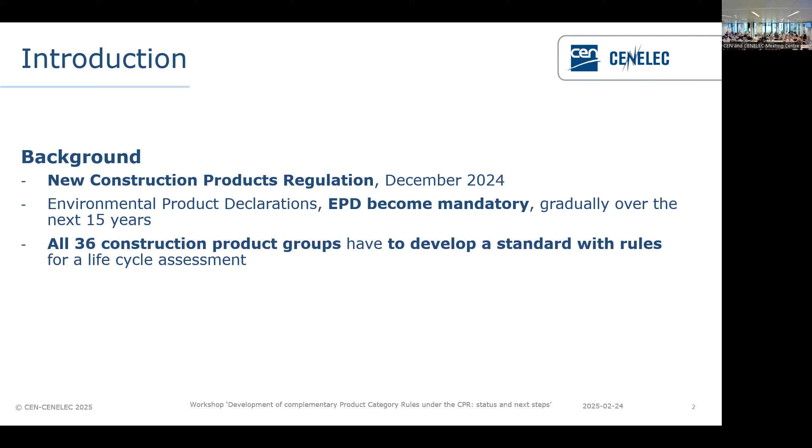All product TCs, all product groups listed in the CPR will be involved. Big exercise, so we thought as CEN TC 350 it would be good to explain to you what the current status is, inform you on that, but also collect information, questions, and concerns from you, because we know there are a lot of questions. We will do our best to answer what we know today.

The questions we collect, also from the chat - I think there's over 300 people online - we will collect them. We will not answer them today live, that's a bit too challenging, but we will collect them and answer as good as possible over the coming month. There's also some information on next steps.

We have foreseen, after every speaker - Karine will present the agenda in a minute - time for questions and answers, mainly from those who made the effort to come and join us here. So a big welcome. Let's hope to have an interesting, fruitful day with a lot of discussions, and that's maybe the start of a new era of environmental information, and also that product TCs know how to deal with it.

And then I hand over to Karine, who is the manager of TC 350, and who I'm happy to collaborate with. So thank you.

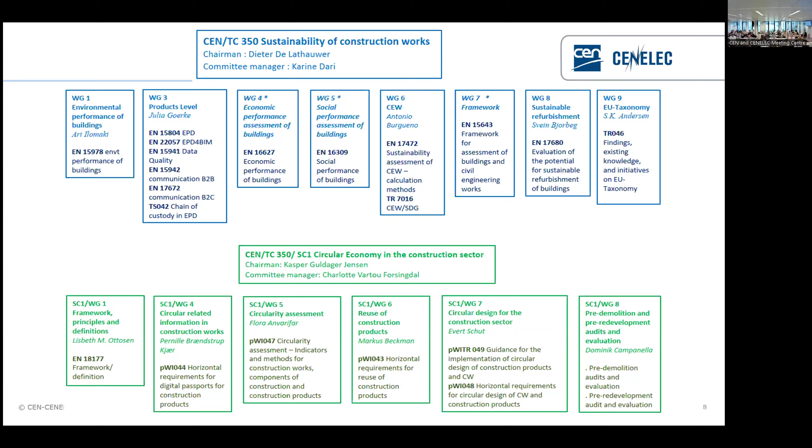And the one which interests you is working group 3 of the TC with 15804 on EPD, but also a standard we have drafted with ISO. It's on how to deal with EPD in the BIM, so for digitalization. And we have data quality, communication, B2B and B2C.

So that's the presentation of the TC, and now I will let the floor to the next one.

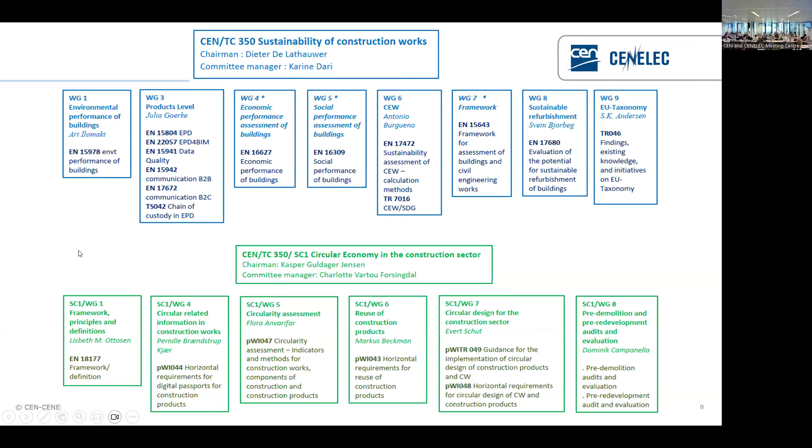Who is Oscar? Do we need to run this presentation? Yeah. It's the first number 1, right? It's the 1. Hello, good morning. Here he is.

Thank you for the invitation to participate. I know there is a lot of expectations. We have been receiving questions and comments about the c-PCR and all the work we have been doing. So I hope I can provide a bit of light in this complex topic. Sorry, because I could not send the slides in a way that could be integrated in the slide deck, so they are now changing.

But first of all, my first message for you is that I know the work you are having in front of you is very difficult, but I wanted you also to think of how this will result in a future system that will be fully harmonized and will really transform the traditional business of EPDs into really a system that is integrated in the regulation and also serves the purposes of the regulatory requirements established at European level and also at national level. So I think it's a lot of work - I know it's just transferring very complex technical content into a regulatory framework, but the added value will really be the single market and also reduce the efforts of manufacturers who will be able to work once on the environmental assessment and use this information in any context. So that's the goal we have.

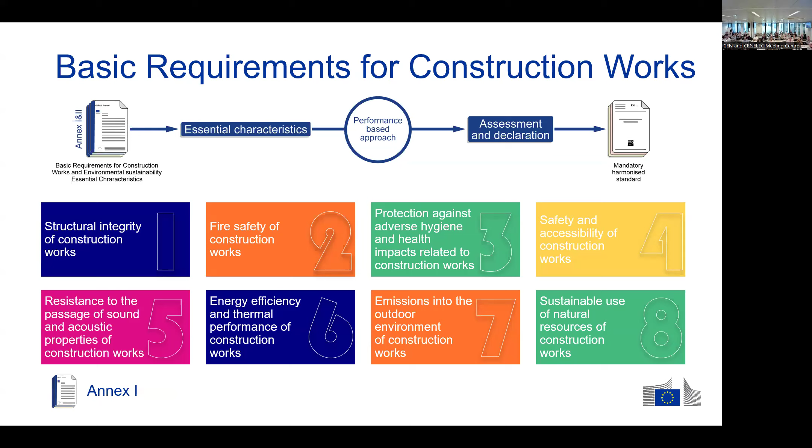Not a big change, but also I think it's important to mention the issue with the release and emission of dangerous substances. The part that is more connected to the work in CEN/TC 350, not only but more connected, is the environmental indicators.

Standards will always contain the full list. So you will always have all of them.

Imagine you have the standard in 2029. In 2029, you can decide to declare all, or you can just declare climate change effects, but you will need to revise your DoPC by 9 January 2030 to include the others if you didn't declare them before. So this is how the obligation will apply.

I have discussed this with some manufacturers. Some say, well, I do the assessment, I will put the full list from the beginning, there is no point. Others may prefer to really focus on only the mandatory obligation.

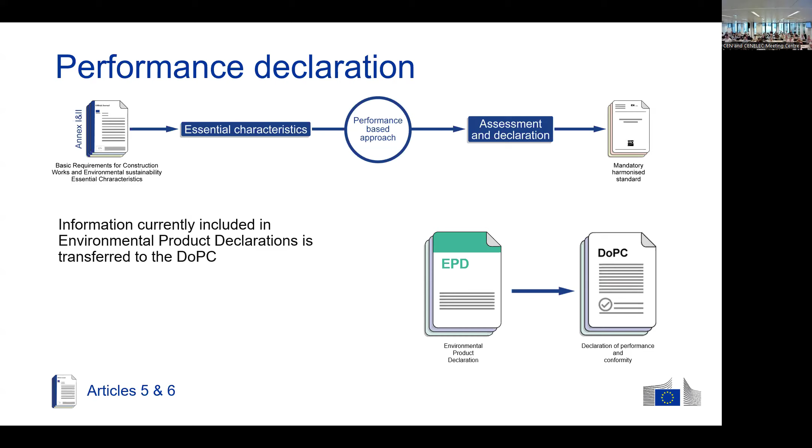The regulation, really the core of the environmental part of the regulation, is EPD information. But the regulation also includes the possibility to establish some requirements. One of them is environmental requirements.

This is a complementary element for environmental characteristics that cannot be assessed and declared. So if we want to establish a specific requirement for a product, such as it cannot be glued, or it must follow a certain process.

Because we identify that this process or procedure really undermines the sustainability of the product. On the contrary to the approach we have for the first part, where all the EPD approach, the LCA approach, will work horizontally, this part is product specific. So we discuss product by product if we need these specific requirements.

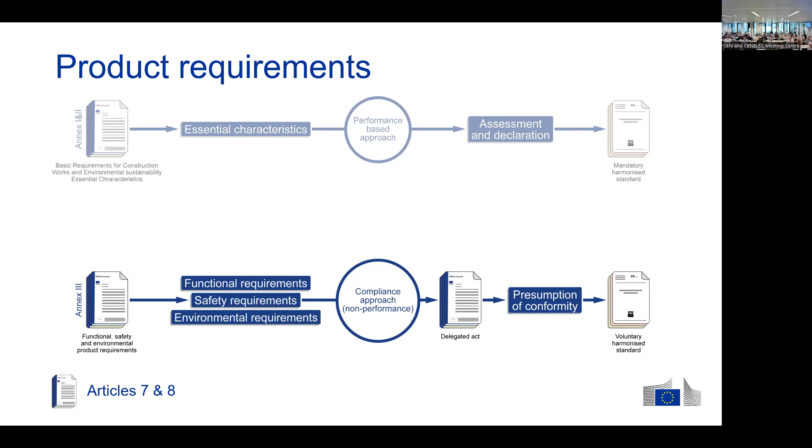At the moment, in the process we have been going through in the last years, we didn't find any requirement, but we may find them later when we go through all the products. And you have a very long list of elements that could be subject to these requirements.

So if we have a life cycle assessment, in that assessment we have an evaluation, and you have the values. If we need to establish an additional condition, an additional requirement, we will cover this. That's why you see sometimes the same element appears in both.

So you have, for example, recycled content, and you will have secondary material. It doesn't mean we are going to implement it twice. The default approach will be the part that is for the LCA. But if we also identify the need to establish an additional requirement, we will do it in this context.

And the process you saw is a bit different, so it's not included in the standardization request. I just wanted to clarify this because there are a lot of questions about it, but it's not the main focus of this group. Your main focus is the other part.

And there is a third element, which is the guidelines, part of the information that manufacturers will be obliged to deliver. This is also not so close to the work of CEN/TC 350, but it's important because what we want in the regulation is to ensure that for some practices and processes that are out of the control of the manufacturer.

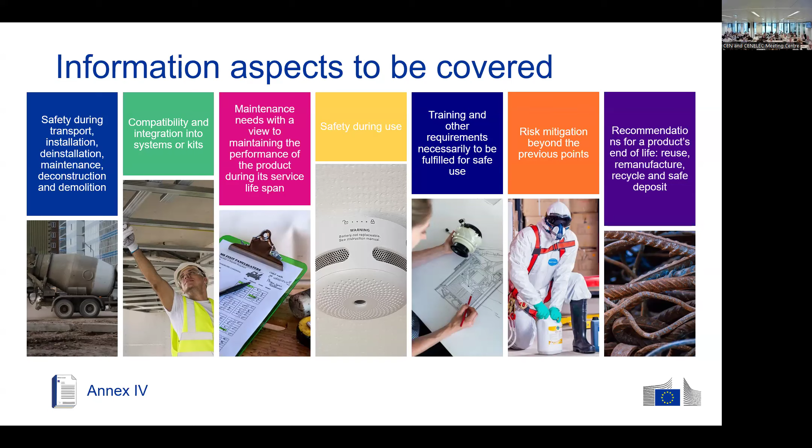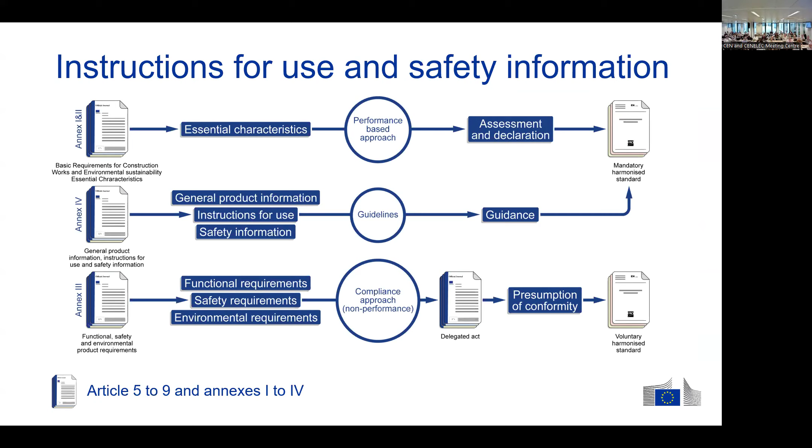So the idea is that with the top branch, we really deal with the real environmental information. The bottom branch is just to complement it with specific requirements to ensure that we do not have environmentally unfriendly products in the market. And the middle branch is to ensure that when the products are used, the information about them is clear and available.

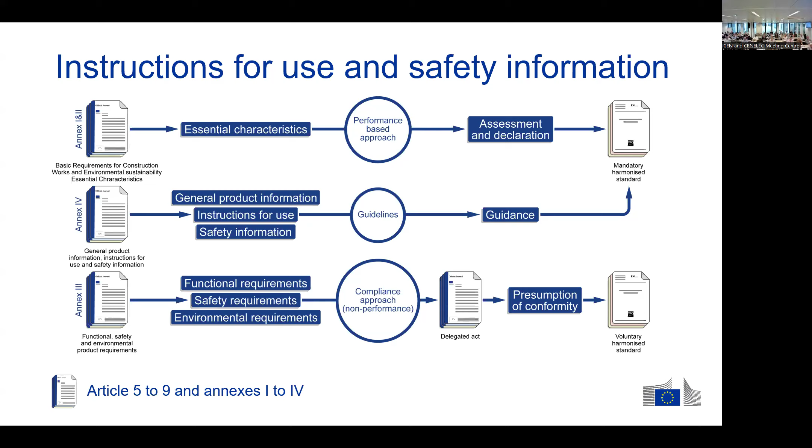A big concern: if you have national obligations for the installation, for the end of life, or for whatever in the building, they prevail over these guidelines about installation. So this regulation is about placing on the market, not about installation. You write the information there, but what really matters is what is mandatory in the country where the product is installed. So this is a bit the legal framework.

I know it's not very easy to digest, but I see that some of you have seen these diagrams a lot of times, so probably you're even bored of them. But I think it's always good to explain and provide a bit of focus.

Then I'm going to speak about the CPR process, which is also a process very related to the activities of the product groups and CEN/TC 350. And we have the specific subgroup on environmental sustainability.

I think probably most of you are also experts there, or at least have access, because the moment you are an expert for the CPR expert group, even if you're an expert in, say, cement, you have access to the information there.

We have milestones, I will explain them, and we have some documents that will help you to work in this field. So what are the main goals?

Develop the technical frameworks, so clarify how a voluntary standard leading to environmental product declarations in the market can be used in the context of a regulation, for which some rules are a bit different. So this is the role of this subgroup - clarify how it works.

We also have to ensure consistency across materials, in the same way that the work CEN/TC 350 is doing when they assess c-PCR, to ensure that we are not having double counting or gaps in the environmental assessment.

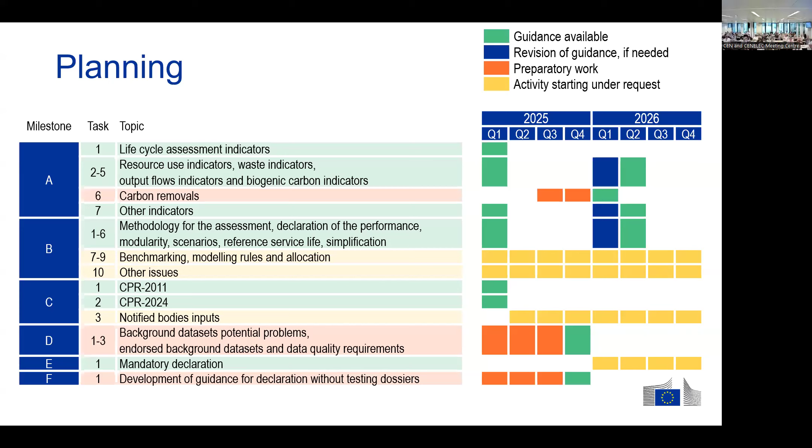Pending issues you see in orange: we have the carbon removals, we have the background data sets. So the work of this group continues, and we are trying to solve the problems we identified over the last years.

Very fast - milestone A, we have the LCA indicators, which were already in the regulation, no discussion about them. Other EPD indicators are all included, and other indicators outside the CPR, outside 15804, are for the moment not included. We will see in the future. We didn't find really enough reliability to go for additional indicators. This discussion may take place in the coming years, but for the moment everybody should focus on the indicators in 15804.

Milestone B is about the methodology, and I want to clarify something. In the regulation we mentioned a software delivered by the Commission to do the assessment - this is not an LCA software. This is just the information that you need to do the calculations, like the characterization factors. And we are now working on the possibility to also have background data. This is what we are doing.

In future, I don't know what will happen - we may have a software, but for the moment, in the short to medium term, there is no software from the Commission. In the negotiations it was written in that way to be as open as possible. Potentially in future, if the system is mature enough, it may happen.

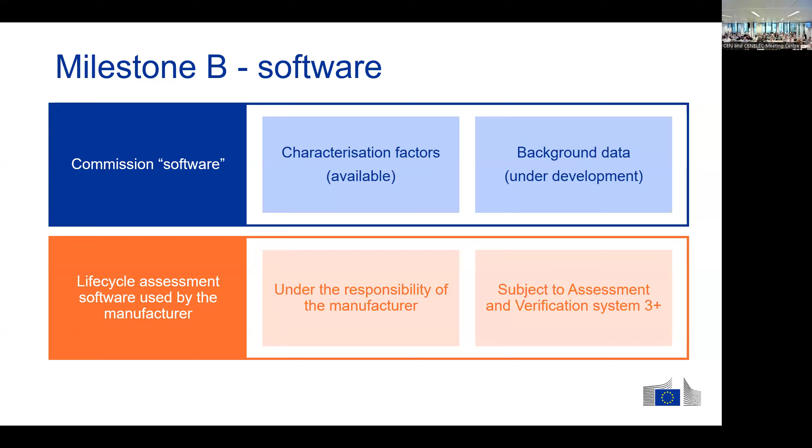There are clauses in 15804 that do not apply. This is a summary, please check the document in milestone B for details. Types of EPD do not apply because in the regulation we have the full life cycle. We also have the release of dangerous substances, ownership and responsibility. The project report will not be there, it will be the technical documentation. So be careful, not everything in the EPD will apply in the CPR. It doesn't mean it's useless. It's very useful if you're producing EPDs outside the harmonized zone, either because you're not yet in the new CPR or you won't be in the CPR. There are products outside the harmonized standards. But it should be clear these parts do not apply in relation to the declaration of performance and conformity.

Very important also, there will be a huge amount of information. You already know EPDs are very big, and even with some only covering some modules, there's already a lot. We're also having more information about the scenario, so all the information will be digitalized. That's why we are digitalizing the information as part of the DOPC. You will have all the information in the DOPC: the technical information and all the results of the life cycle assessment for every module, every indicator, everything. It's a huge amount of information, that's why we need to digitize it. So this is also an important message.

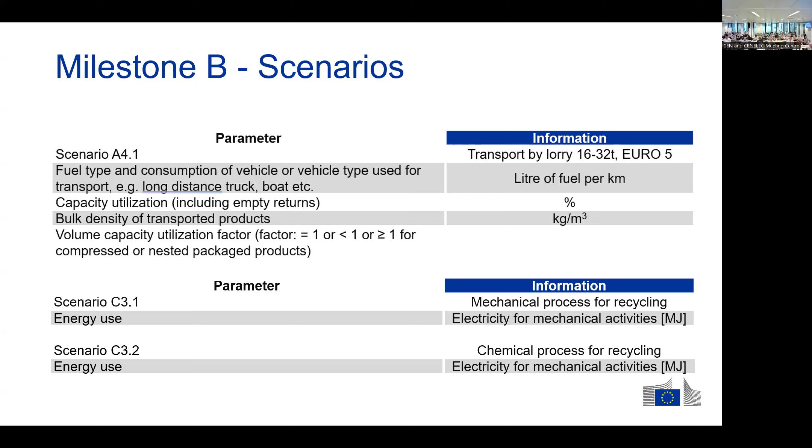It's really independent because values are very low. You can have a European scenario with no parameter at all, but this is just in case, for example for maintenance when you use certain chemicals. In general, though, we go for parametric scenarios. Also in the document you'll find a point that is very relevant, in particular for SMEs.

The simplified procedures that are applicable to the CPR in general also apply to the environmental information. You have here a summary. The first one is very important: declaration without testing.

We can adopt a delegated act at European level and have a kind of default value that does not require any assessment or calculation. The manufacturer will be allowed to just declare this performance without any additional condition. If we decide for certain products, it will apply only to these products. It will be very conservative, covering a situation in which it's always like this. If you are familiar with the performances, this is very common for fire performance—there are products that are classified as A because the fire performance is always good.

This is the same. So if you have a product for which certain environmental emissions are always below one value, we adopt a delegated act. We establish under these conditions that the manufacturer can declare this information without really having to go through the System 3 Plus. This is very important. We need the support of the industry and stakeholders to do it because we don't have the technical content to do it, but you may have it, and this is a process we are now discussing.

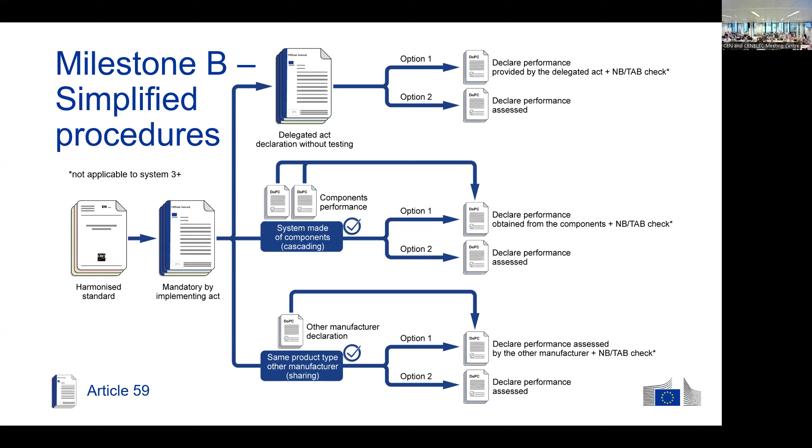I think this is also important because this is going to be quite complex for a lot of companies, since System 3 Plus will apply to products which are now System 4, where there is no notified body.

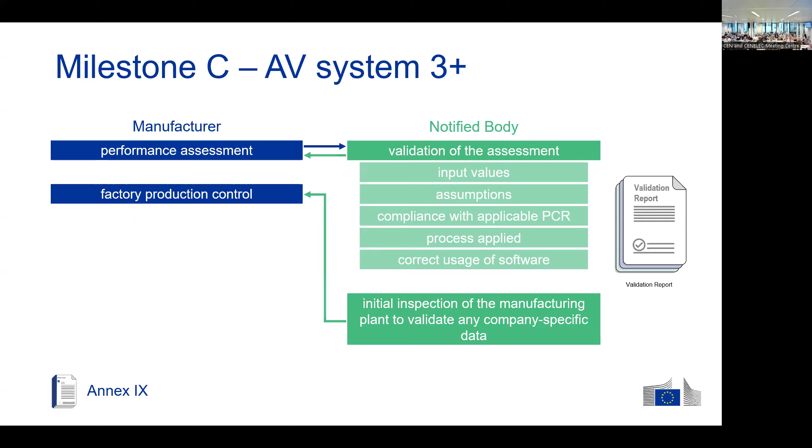System 3 Plus is clear, it's in the old CPR and in the new CPR. As I said, we had some discussions with the group of notified bodies to make sure how it works. Probably it's not what you expected—this is the result of the negotiations. I hope it will be reliable enough and not too burdensome, but this is what we have.

We are also discussing with the CPR acquis expert group if we need to change the priorities from 11 to the end, but don't expect big changes—we will only change if we see there is a problem. It was a bit strange that we had precast concrete before cement aggregate, so this is a situation we may need to address, and also group some products, but in general I hope it will be okay.

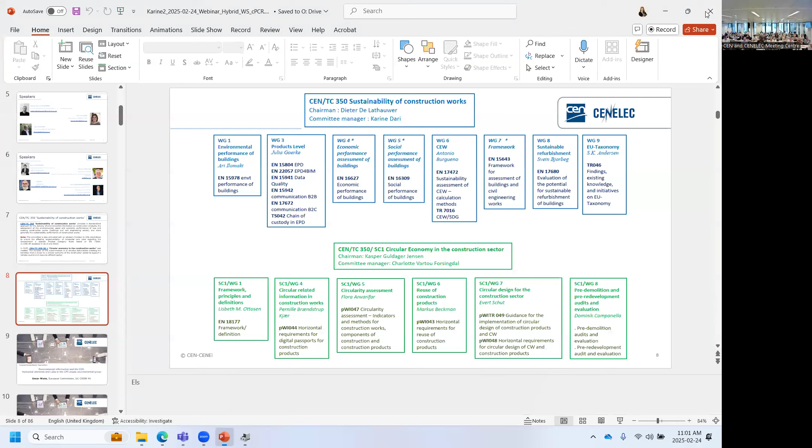Yeah, so good morning everyone. I will not stand because the participants online cannot see the speaker, so I will turn the camera here, so the 400 people at home can also see the speaker. So...

Okay, so the goal of this presentation is to explain the process of how harmonized standards are developed in the context of the c-PCR, and also to make the link with the c-PCR. This is the structure of this presentation: first, I'll go through the workflow of how harmonized standards are developed, then shortly explain the CPR acquis process, then go through how standardization requests are developed, also harmonized standards, and at the end give some important highlights on aspects the CEN TCs need to have in mind when drafting the c-PCR.

Some acronyms. You will see some of these in the slides of my presentation. I just want to mention two that are quite important that some people never heard of: SRAHG, which stands for Standardization Request Ad Hoc Group, and SReq, which stands for Standardization Request - not the cartoon character.

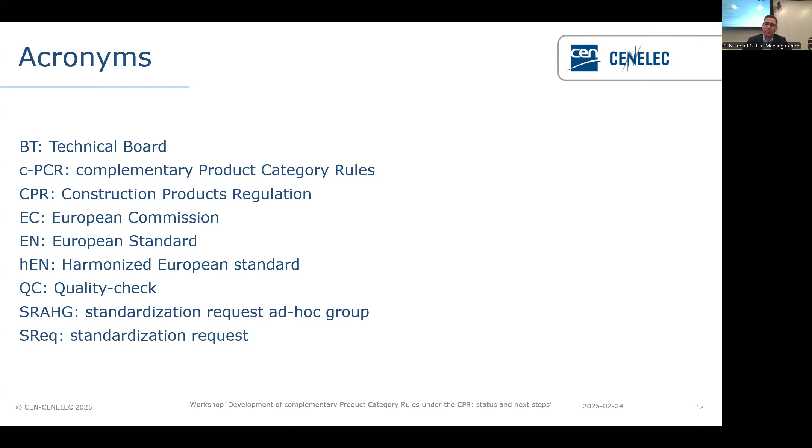Here you can see the flow of how harmonized standards are developed in the context of the new CPR. As a first step, you have the CPR acquis process. When this is finalized, we enter step 2: the standardization request is developed and hopefully accepted by CEN. Step 3, CEN technical committees start drafting the harmonized standards. Step 4, the harmonized standard is published and offered to the European Commission for their assessment.

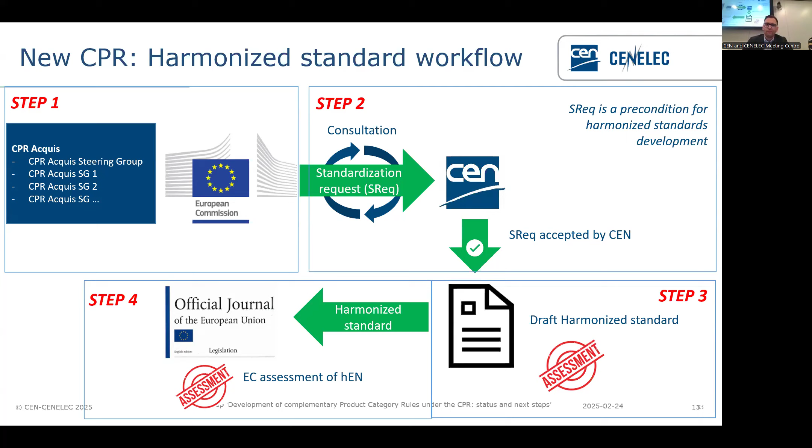Step 1 is the CPR acquis. The goal is to ensure compliance of the harmonized standards with the legal acts - the mandates, the delegated acts - with the current and revised CPR. Because it's a lot of work, the Commission had to put in place a priority list, developed based on a survey sent to member states with criteria. The outcome of that survey is the priority list you can see here of 34 product families.

The Commission, together with experts and also CEN TC experts, are part of these subgroups of the CPR acquis. The Commission started with the ones on top. The main task of the CPR acquis is really to collect, to gather all the necessary information that will help the European Commission draft standardization requests.

From the CEN point of view, that's our position in a way. We really need the CPR acquis. We need all those old mandates that contain outdated information to be revised, so we can have new standardization requests and develop harmonized standards that are state of the art. I will not go through this list since Oscar already mentioned it, but we can discuss it later after this event.

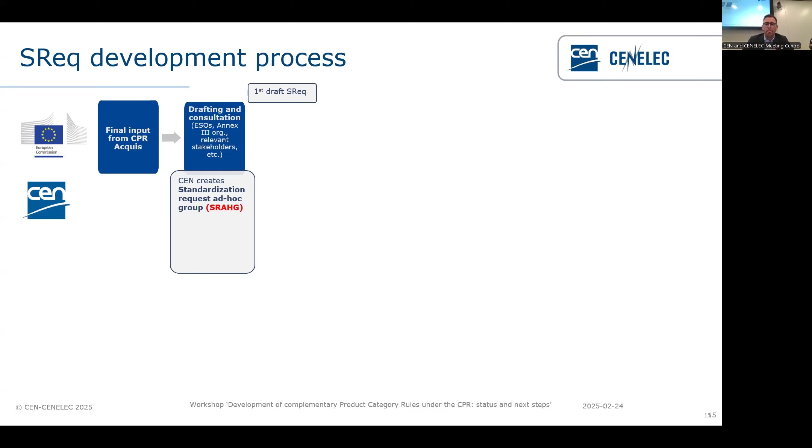On this slide you have some explanation of what the SRAHG is, but in short, the SRAHG has two main tasks. The first task is to go through the first draft standardization request, or different drafts, and then prepare comments and agree on the comments to be submitted to the European Commission. That's task number 1.

Task number 2 is when we receive the final draft standardization request - the SRAHG has the role to discuss the content of this final draft and then provide a recommendation to the CEN technical board on whether to accept or reject the standardization request.

In terms of membership of the SRAHG, you have the convener, normally one of the chairs of an impacted TC by that standardization request. CCMC holds the secretariat of the SRAHG. You have interested CEN-BT permanent delegates - this is the new name for CEN-BT members, by the way - experts nominated by the CEN-BT permanent delegates at national level, partner organizations, but really important, representatives from the impacted technical committee. So this means you.

Back to the process of how to develop a standardization request - there are many steps, but I will focus on the most important ones. As soon as we receive the first draft standardization request, the SRAHG will collect comments and hold meetings. From my experience with the two ongoing ones, it's really many meetings if there are many comments. All the comments provided by the members of the SRAHG need to be discussed and agreed.

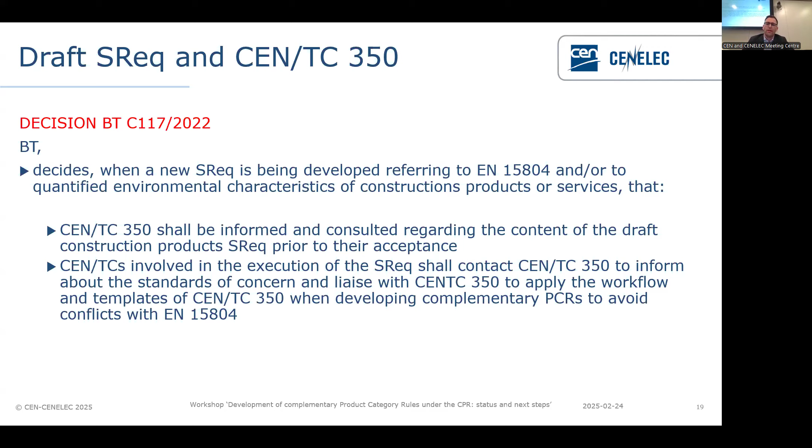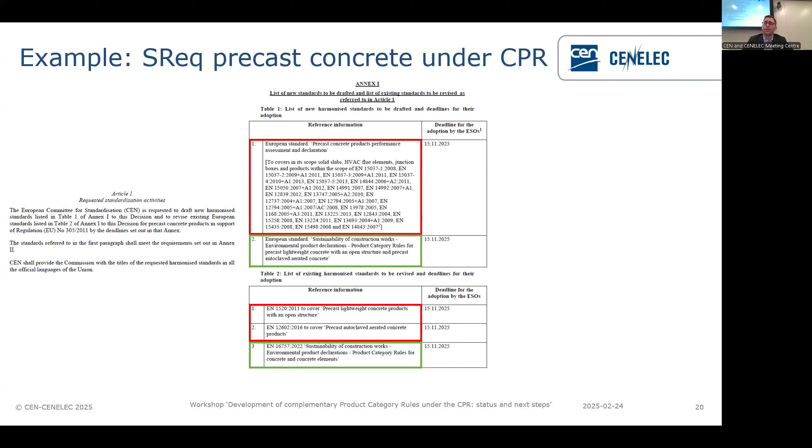Each of these standards will have a deadline. This is exactly what I explained earlier, so the deadlines are here, okay? And this is something that we need to have in mind. The Commission may also ask us to develop c-PCRs within the standardization request.

The Annex 2 of the standardization request is the longest part of this document. It includes very general requirements on harmonized standards, on normative references, and so on, and then very specific requirements for each of the harmonized standards to be developed. One of the horizontal requirements we have seen from our experience is that the standardization work must be in line with the horizontal standards from CEN/TC 350, in particular the EN 15804. There is also a statement that the standards need to be aligned, at least for precast concrete products, with the c-PCRs.

Moving to the specificities of each harmonized standard, the Annex 2 indicates what each harmonized standard needs to have: the products covered, the intended uses that are applicable, and all the list of relevant essential characteristics. There is one essential characteristic that will be common for all harmonized standards, which is environmental sustainability. In general, each essential characteristic will need an assessment method, and the assessment method for environmental sustainability will be the c-PCR. So this is really the link between harmonized standards and the c-PCRs.

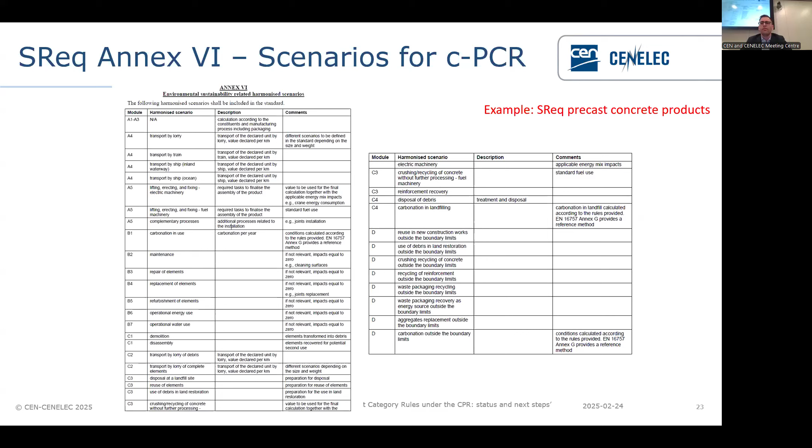So the question is, is a c-PCR a harmonized standard? The answer from my point of view is it depends. If it's included in a standardization request, then yes, it is a harmonized standard. Why? Look at Article 2 of Regulation 1025, which explains what a harmonized standard is: a European standard requested by the Commission to support EU legislation. So yes, it is a harmonized standard, but no, it will not have an Annex ZA, and no, it will not go through the process we have in place for performance-based harmonized standards. But it's important that you have this in mind.

This is step 3, how harmonized standards are developed - performance-based harmonized standards. This is not for the c-PCRs, it's always good to clarify that. First of all, you need a standardization request because that gives you the legal basis. For your information, we have a new process in place for the development of harmonized standards. This is quite new for the construction sector because, as you know, there has been a blockage for some years. It brings some quite important elements that we hope will help the technical committees.

First point, the HAS assessment system will still apply for performance-based harmonized standards, with a max of 4 HAS assessments per development of the standard. We are introducing as well a concept of the CEN quality check, which will be done by CCMC. The idea is to support the technical committees to ensure compliance with the standardization request and with the criteria of the Commission, which is quite well known, and to improve the chances of technical committees receiving compliant assessments by the consultants.

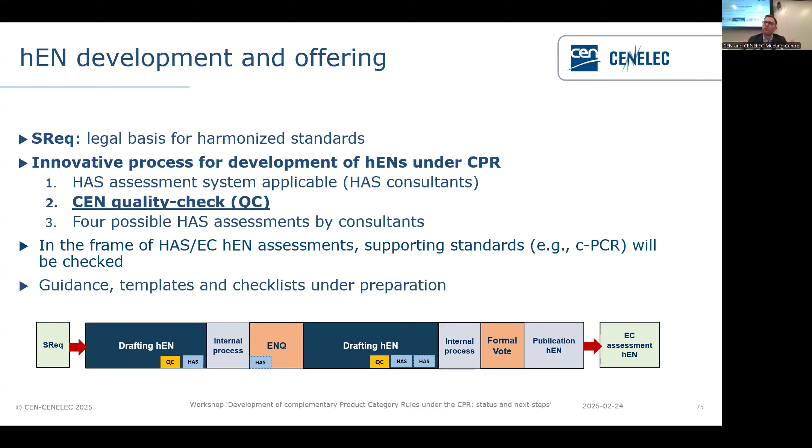The CEN and CENELEC Technical Board have approved a revised version of Guide 36. This is a very interesting document because it provides guidance to technical committees when drafting performance-based harmonized standards for the CPR 305 from 2011. This document was urgently needed because we have a standardization request coming for precast concrete products, and we need to support this technical committee with guidance.

For the environmental sustainability part that needs to be included in the harmonized standard, we have drafted model clauses to help not only this TC but future TCs as well. We are working together with the Commission to revise Guide 36 to address the new requirements of the new CPR, but I'm not foreseeing many changes for the environmental sustainability part.

The template for Annex A has also been revised. This is only for the performance-based harmonized standards, not for your c-PCRs. The template of Annex A now also includes in the list of essential characteristics the full list of characteristics for environmental sustainability. So do not touch them, don't delete things, just insert the information that is required. So I'm just concluding my part.

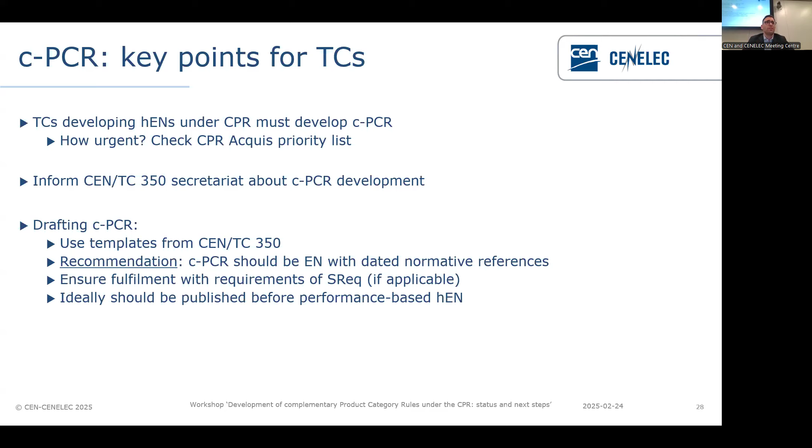One of the rules is that we cannot offer to the European Commission, for their final assessment, a performance harmonized standard that includes supporting standards or normative references that are still draft standards. So ideally, your c-PCR should be published before the harmonized standard is published. That's an important point.

Be aware of the BT decision - I don't get tired of insisting on this. The BT took a decision saying your c-PCRs need to be aligned with EN 15804, and you are encouraged to liaise with CEN TC 350.

If I missed you, I'm sorry, but I know there are some c-PCRs still not registered that are quite high in the priority list. So that's the message: keep working on your c-PCRs, because there will be an assessment method for harmonized standards. Thank you, and I'm happy to answer questions.

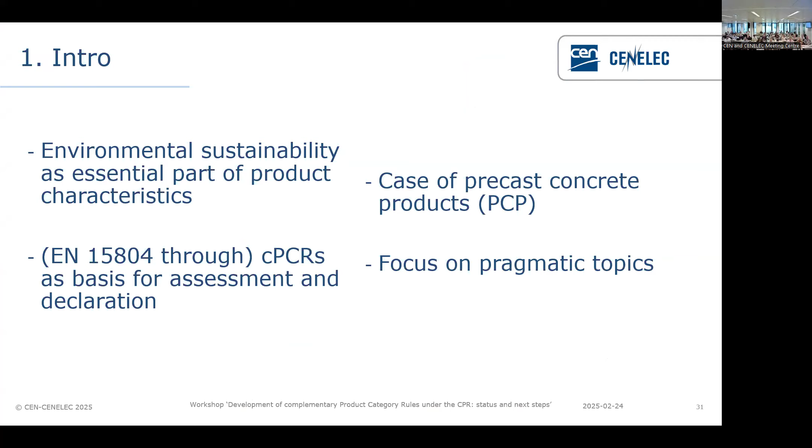Yes, it's something we have been discussing this morning, this part. I will not repeat it. What I'm going to bring to you today is our experience as the first TC who was confronted with this topic. So really our case, focused on pragmatic topics. I will go through the legislative framework as well as the organizational framework that was described by Oscar and Nuno, and explain how we tried to address all this.

I want to clarify that this was the way of TC 229. It doesn't mean that it is the only way, but it is how we have been addressing it. Let's talk a little bit about the challenges ahead and my advice to you on how to deal with it. So considering the legislative framework, CPR, you have already seen this graph. First, a very important point: we have a standardization request under the old CPR, 2011.

This is because of legal reasons. When the standardization request was prepared, this new CPR was not yet in place, so all that I'm explaining to you concerns the old CPR. Many things will be common, but not everything.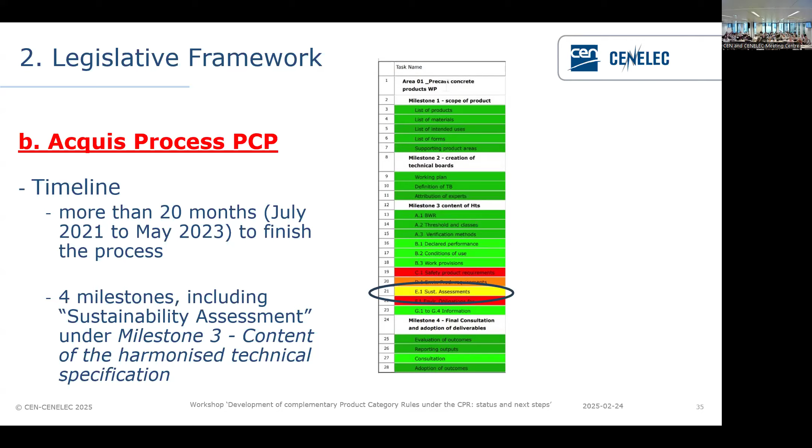Second point, the acquis process. Just to give you an idea, for us it lasted more than 20 months. We started in July 2021 and finished in May 2023, just before the standardization request was issued. You can recognize there the milestones, in particular milestone 3, the part on the environmental assessment, sustainability assessment from the environmental point of view. That's concerning the acquis process.

It has also been mentioned, this horizontal group on environmental sustainability. As it is mainly dealing with the CPR 2024, for us it was more a kind of guiding principle, in particular, as mentioned before, on which clauses of EN 15804 plus A2 do not apply - not because they are not compatible, but simply because the CPR regulatory framework defines it. So, for example, all the several clauses in Chapter 5 of 15804 on the type of EPD, ownership, additional information, communication format, and Chapter 7, 8, and 9. As I said, it doesn't mean it's contradictory. I'm simply saying that the CPR provisions apply and take precedence over EN 15804.

Concerning the standardization request, so I said we finished the acquis in May 2023. We got the first draft of the standardization request in September 2023, and it was finally voted for us in the Committee of Standard in February 2025. So also here there is some time for this development.

What is the standardization request composed of? It's composed of legal text, as we all know, and 7 annexes. I will now focus on 3 of them - Annex 2, Annex 3, and Annex 6 - which have information about essential characteristics related to sustainability. So Annex 2 is about the requirement for the standard.

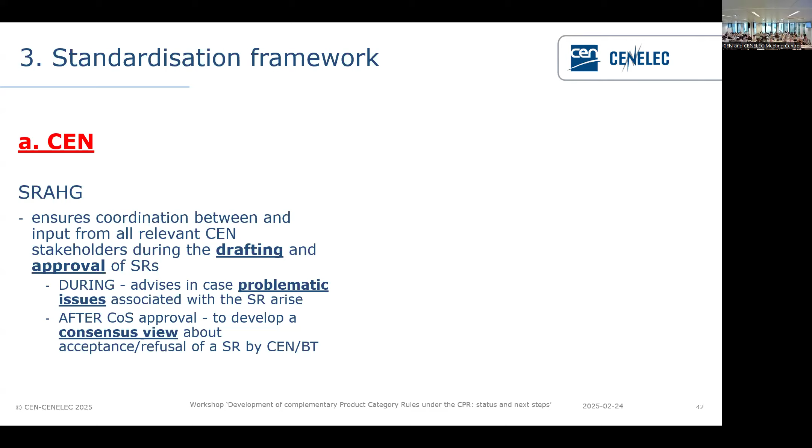Indeed, we have been working in the SRAHG at two moments. First, when the standardization request was delivered, to work on advising on problematic issues or on how CEN sees this standardization request. And then when the Committee of Standard approved the standardization request, or towards the end, to give advice to the CEN/BT to vote for it or not - so to accept or not this standardization request.

At the level of TC, the standardization request for precast concrete products actually also includes autoclave aerated concrete and lightweight concrete with open structure, which is standardized under TC 177. So 2 TCs for 1 standardization request. I think it's going to be quite similar for others that will not be alone, and I will come back to this. But I'm talking today about CEN TC 229.

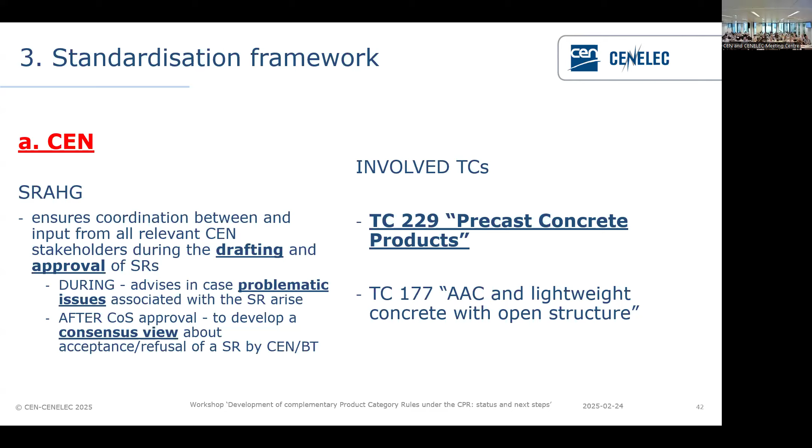Maybe a few pieces of information about how our harmonized standards are structured and how we have changed in line with the new standardization request. So today what we have is 27 harmonized standards which make reference to what we call common rules - non-harmonized standards called common rules - so everything which is common to all the different products, which then make reference to supporting standards, the Eurocodes, and we have our own c-PCR, 16757, complementary product category rules for concrete and concrete elements. This is important information, a kind of standalone voluntary standard for providing EPDs.

How do we have to change the structure? We have to change the structure to be compatible with the new standardization. So now we have only one harmonized product standard, which will include all the different product families that before were developed into 27 harmonized standards, which make reference to supporting standards, like for example test methods and the c-PCR.

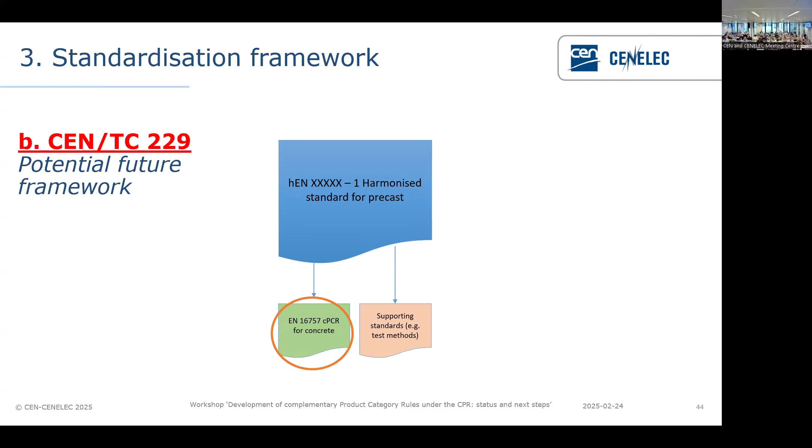So I will explain later in more detail how this interlink has been done. And then we will have a non-harmonized part for precast, for example for production and other things, which have nothing to do with the essential characteristics, and which will be separated from the harmonized zone.

So at the end, how do we quote the specifications for environmental assessment? Basically, we start from the standardization request document, the input from sector group 5, the horizontal group, for example which parts of EN 15804 do not apply. We come out with the harmonized standards with clauses and annexes, and the c-PCR for concrete and concrete elements used as a supporting standard. This was our choice, but it doesn't mean this has to be the choice for everyone, and I will explain why we went through this approach.

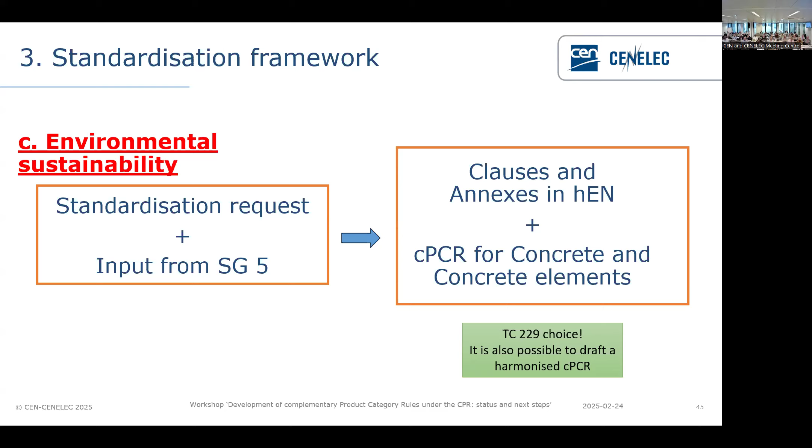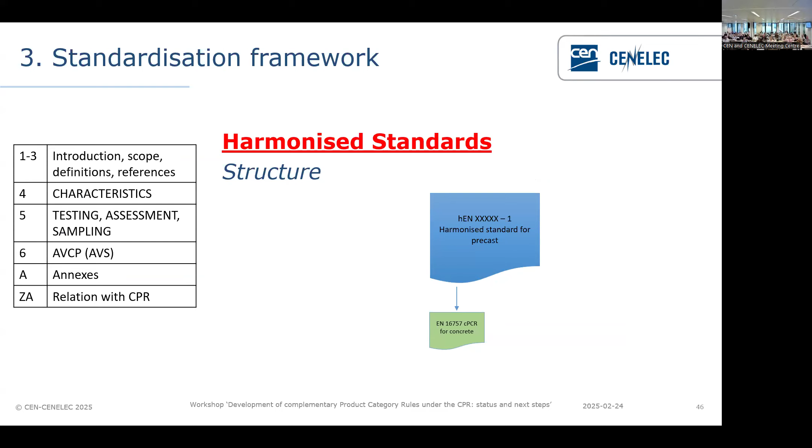So how is a harmonized standard structured? Well, it has a general sense structure: you have the introduction, then characteristics, test assessment sampling, AVCP, annexes, and Annex ZA. Now we will show you for each of these chapters how we have introduced environmental sustainability assessment.

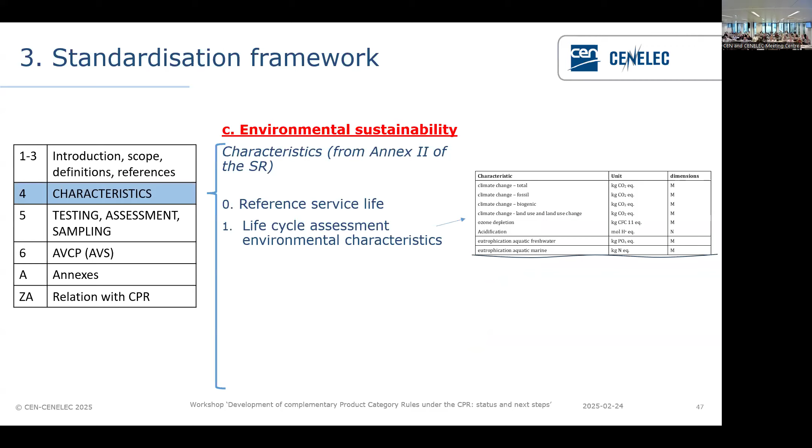In terms of characteristics, this comes directly from Annex 2 of the standardization request. So we have the reference service life and all 38 parameters from EN 15804 divided into 5 classes. Here you will find the full list of 38 characteristics.

In terms of testing, assessment, and sampling, for the reference service life we make reference to the c-PCR for concrete, and we only had to add a distinction between off-the-shelf and made-to-measure products. Those of you into structural elements will probably recognize this.

For all the other environmental characteristics, for all the other 5 families, we basically have the same approach: reference to 15804 plus A2 and c-PCR for concrete, with a specification that the assessment shall correspond for each module and each scenario. You know the different approach in EN 15804 for EPDs, and this comes from the CPR.

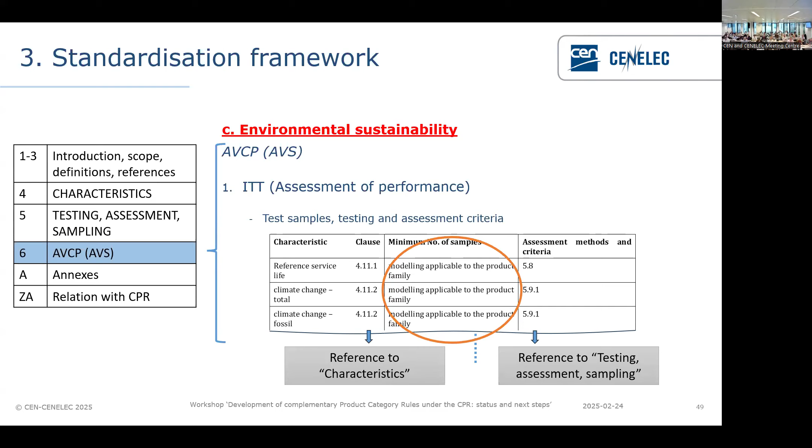Then we enter chapter 6, assessment and verification of constancy of performance under the old CPR, or assessment and verification system under the new CPR. We have introduced environmental sustainability into 2 parts. First, in the ITT, the initial type testing, the assessment of performance, where we make reference to the modeling applications applicable to the product. Again, reference to the c-PCR, with the link to the characteristics of chapter 4 and the testing, assessment, and sampling of chapter 5.

The second part is about the verification of constancy of performance. Nothing in particular in the factory production control, but a specific text for the initial inspection. As mentioned before, we are under the old CPR, but with AVCP System 3 Plus issued with the Delegated Act in May of last year, we basically have the same system, System 3+, as with the new CPR.

So initial inspection validates that the environmental sustainability company-specific data are there, with some clarifications - for example only when it is finalized, that all locations have to be included, the possibility to extend environmental information from one site to another, and the need for documentation.

Then in continuous surveillance, there is also nothing extra, but a specific chapter or provision on environmental sustainability assessment validation. So what has to be validated? The ITT. The record of input values has to be validated corresponding to the product type, that 15804 and c-PCR are properly used, and then the need to validate also the process and the software.

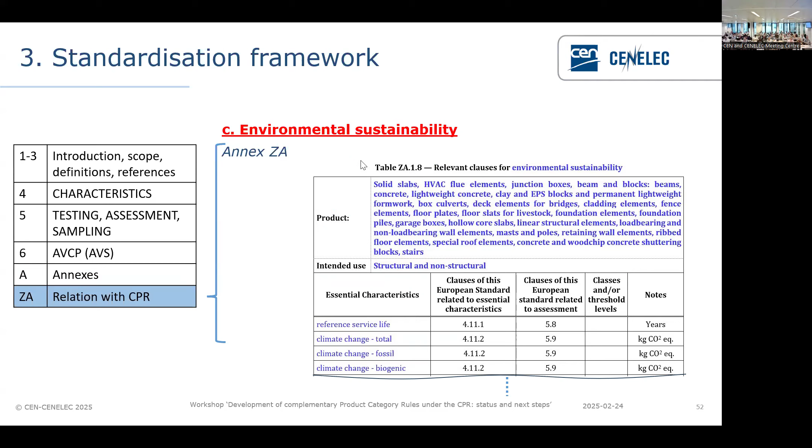And finally, Annex ZA is in the harmonized standard, so we have an Annex ZA in it. In this Annex ZA, we have the full list of essential characteristics, again as mentioned before, as for all the other essential characteristics, with the clauses for the characteristics, the clauses for their assessment, the classes and/or threshold, and the reference limits.

So that is a little bit how we have worked on it from our perspective. We have decided to include the essential characteristics in the harmonized standard, which already exists, and use the c-PCR as a reference, as supporting standard. Other product families might choose a different strategy and develop really harmonized c-PCRs. From our point of view, why we are going through this way, for several reasons.

The first one, as I was mentioning before, EN 16757 is for concrete and concrete elements. Concrete is, until now, a non-harmonized product, so we'll continue issuing EPDs. For precast concrete, when we started looking at changing the c-PCR, in almost all chapters we would have had to write, in this case this applies, in this case this does not apply, which doesn't make sense.

Second point is that a harmonized standard has a given structure - characteristics, assessment method, etc., as I was telling you before. A c-PCR follows the structure of EN 15804, so there is no real need to change the c-PCR from this point of view. And when changes were necessary, we introduced them in the harmonized standard.

The essential characteristic principles are already developed in the harmonized standard, but there was no need to copy it in the c-PCR. And finally, the c-PCR remains separate to use as reference also by other PCRs when we are dealing with the material form.

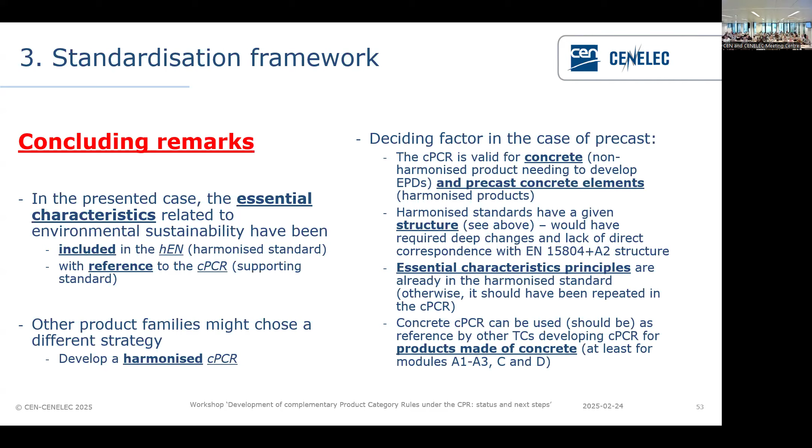So, to conclude, challenges ahead. I have to respect the 15 minutes - I think I'm in the time. Challenges ahead and some pragmatic advice.

Challenges ahead, my view, but also a view shared with many colleagues in Construction Products Europe. On our side, a very tight time frame - 15th of November to deliver the standard. So you can imagine we didn't start in February of this year when the standardization request was approved by the Committee of Standards, but we started well before, though it's still very challenging.

And also, once the standard is ready and available by CEN, it should be published in the official journal before the 8th of January 2026, when the new CPR will enter into application.

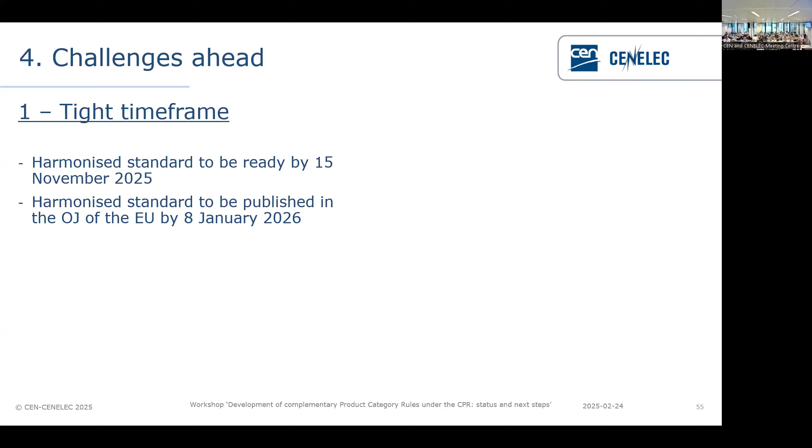The future of EPDs - we still don't know. We will need a transitional period, because when the harmonized standard is published in the official journal, it's not that we will have all the environmental characteristics in the DOP available that day. It's impossible.

So we will need a coexistence period, hopefully of two years, to have the whole system shifting from EPDs to DOPs. And in the longer term, what will be the compatibility of the DOPs? Will EPDs still be allowed? It seems that yes, if they contain exactly the same information as the DOPs, but it's still a question mark that our manufacturers are thinking about.

And also, what is the link with the national databases? What will be their role in the future? How to deal with a transitional period of maybe 15 years where both the EPDs and the DOPs will be available?

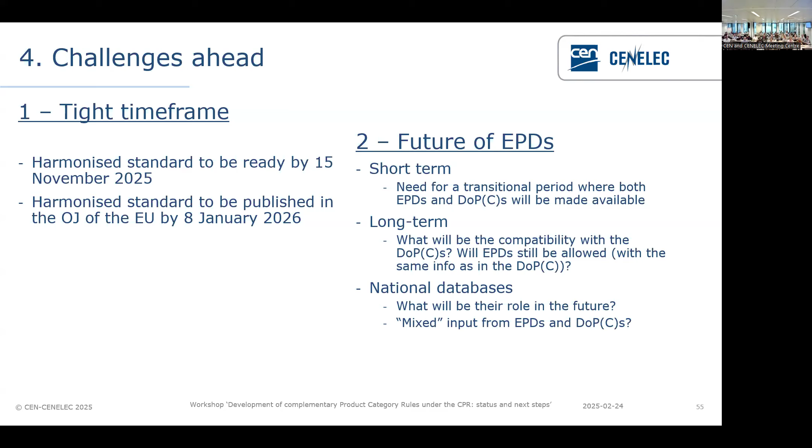AVCP system 3+. Now that the system is in place, will verifiers be available? That's a big question mark. Will they be available since January 2026?

The physical inspections - I think we all know about this issue of validation of data at the beginning, costs, timing. And finally, the acceptance on the market of this declaration, the DOP, a market that is now used to something else. So these are all questions that we are asking ourselves.

And finally, data - this has also been mentioned, I think. What secondary background databases will be accepted? We had some answers from Oscar this morning. The issue with the worst case and the fact that all products must comply with the declarations.

For the time being, we don't have any advice in the standard, but we will try to do that more as an association, giving advice to our manufacturers from this point of view. And finally, what will be the future? It's a question we have a lot of time on - what will be the future of sectoral DOPs in the field of environmental assessment?

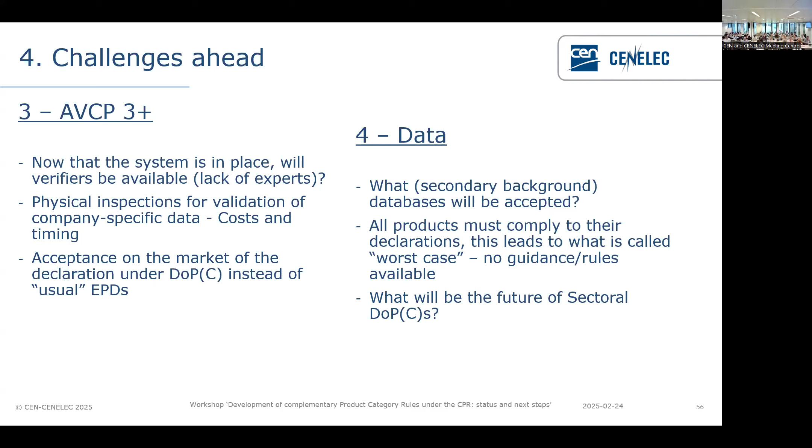So, to conclude, really pragmatic advice from my point of view. The development of the c-PCR starts well before you receive the standardization request in your TC. We start with the acquis process, and the acquis process is done for member states.

But also be sure to liaise very well with member states at that moment, not only as a sector organization or a TC, but also with CEN involved as a TC. I remind you of the role of the TC, very important in different phases.

c-PCR available is a good starting point. So if you are planning to do more or less what we did, and you don't have yet a standardization request, develop your c-PCR. Do that now within this framework. Comply with EN 15804. That would be my advice. If you decide to develop something more harmonized, that's up to you, but take the decision as soon as possible.

And finally, ensure cooperation between TCs. Under the same standardization request, there might be more than one TC, with different interpretations and different interests, but at the end, the same challenge. So really liaise with the TCs under the same standardization request, because cooperation helps in dealing with the same material but different products, to ensure consistency and think about the well-being of the users and not to over-regulate.

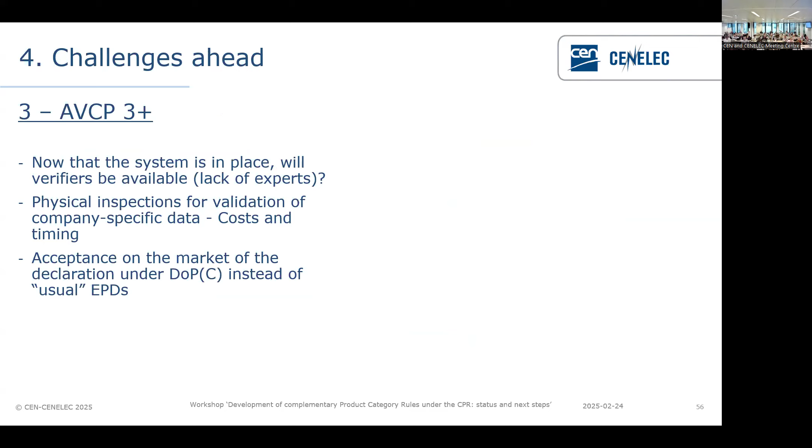Can I just ask the relation - I was a little bit confused between the relationship of your c-PCR standard and whether that was harmonized. I assume that wasn't harmonized, but the other standards were. But there's obviously a relationship, and was HAS accepting of that sort of method?

During the process we had - and this is maybe an advantage that should have put, but I tell you now - during the process, the communication with all departments and the commission is really very, very important. For us, I can say that they have been flexible to listen to what was our view on how to assess the question that they had. So discuss this within CEN, within the commission.

If you have ideas on how to answer the standardization request, check with them, check if this can be accepted. And in our case, that was accepted in the fact that we said okay, we will not change the c-PCR as it is now because it's already compliant with 15804, but we'll have to introduce in the harmonized standards those parts of the standardization request which are related to the c-PCR, but which we decided to put in the harmonized standards instead and not directly in the c-PCR.

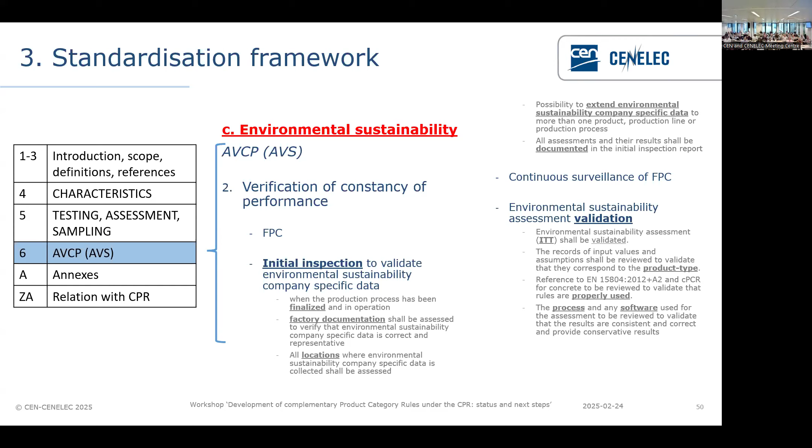And so we did, for example, in Annex 6 of the harmonized standards, where we specify how to implement the c-PCR. So we didn't change the c-PCR, and the additional request from the standardization request we put in the harmonized standard. Thank you - just to mention, I'm Bathroom Manufacturers Association, I convene TC 163.

For those products, we already have a standard for sanitary ware, similar to the one that you have. And the other question - could you just go back through your slides? You quickly flagged up a table that referred to the environmental requirements.

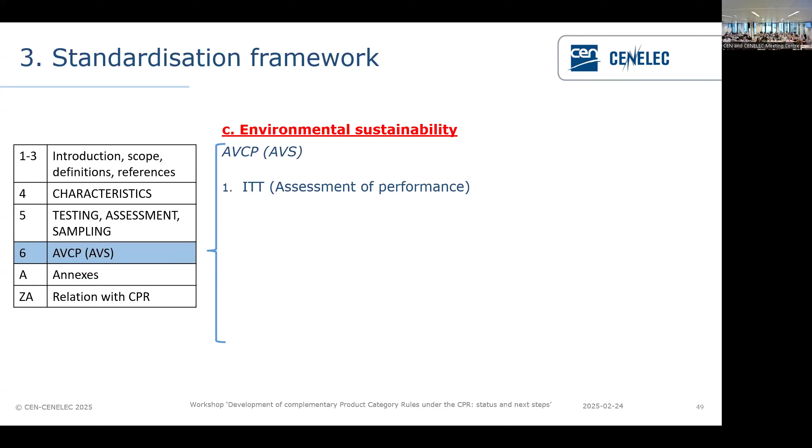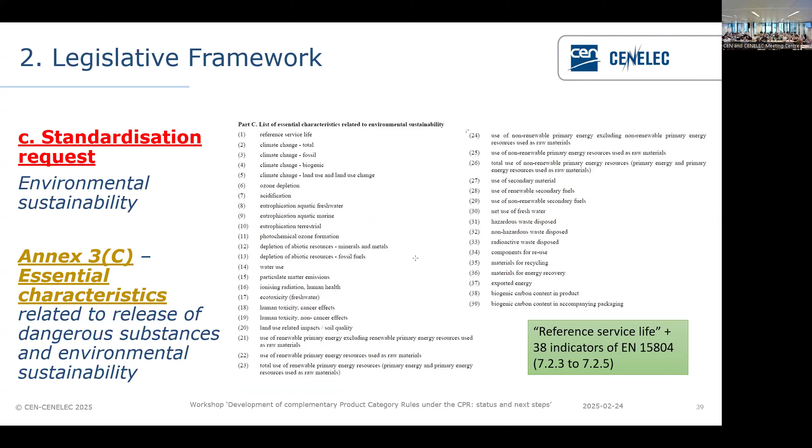Further back, it was before your standardization framework. Okay, Annex 3, you very quickly glossed over it. I was a little confused as to what I was looking at. This one is about the scenarios. Yes, so what is that table referring to?

So in the standardization request, this is Annex 6, where the harmonized scenario that Oscar was discussing before is one of the main requests of the CPR, of the c-PCR. It is to have these European parametric scenarios that can be used by whoever is doing the life cycle assessment, to have the same approach throughout all of Europe.

It doesn't say how many kilometers, for example, if we talk about transport, it doesn't say how many kilometers your product travels, but it says that if your product travels by truck, by boat, this is the way to assess it, how to calculate it basically. Okay, that's Annex 6, it's Annex 6 of the standardization request, which complements the EN 15804 chapter.

This I don't remember. Now it makes sense, yes. Thank you. Okay, jump to Olympia. And then... I hope you can hear me.

Alessio, I think we passed one of the really important points we have on the table, which is the background databases. Another popular area. Can you share some objectives of the legal advice that you will give to your members around this topic?

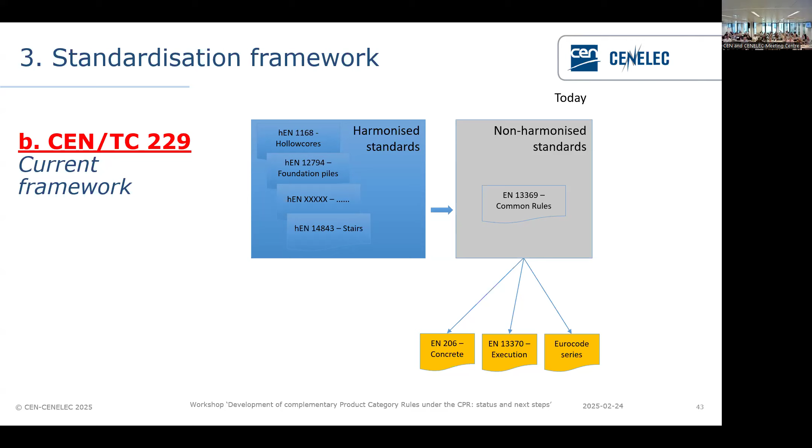Let's get things started again. We have an interesting afternoon, I think. First, Oscar will continue on the link of what we are doing, declaration of performance, environmental characteristics, and other EU legislation, so it's not, as mentioned before, just one purpose only. Then Julia will continue on what this really means in practice to develop a c-PCR, and the relation with TC350.

Then we have a presentation on some gaps, and there is an exercise ongoing to collect gaps and issues on standardization. Just for information, Erik Pennings is excused because of some serious family hospitalization, so I will take over his presentation as best I can.

Okay. So now I hand over to Oscar. Afternoon.

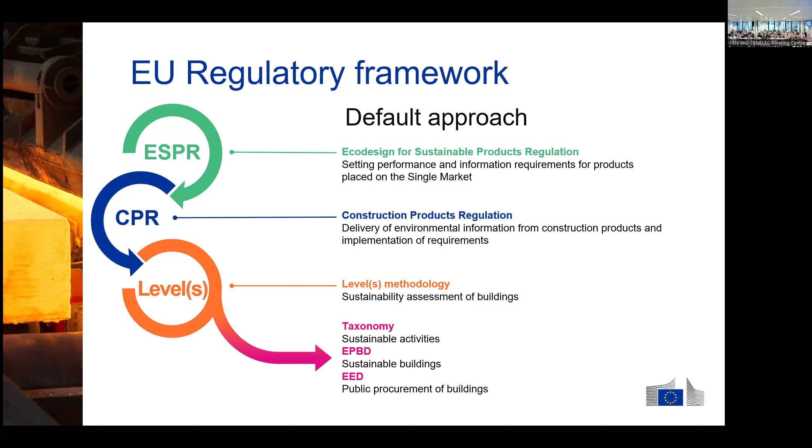There is also a situation for some products which are not necessarily having obligations under the CPR. So these are the boilers, the air conditioning. These generally are only regulated under the eco design. So in this case, the system is not going through the CPR, so I'm not involved. But what we need to make sure is that the information delivered when they revise the eco design requirements is enough to be integrated into the calculation of levels and any other policy that addresses the final product.

So I know it's a bit of a challenge, because traditionally these regulations, the eco design was really focused on consumer and labeling, but we need to make sure that there is also additional information that can be used to satisfy the other regulatory requirements.

And again, this also applies to the national provisions, but in the CPR it's very clear. In the CPR, we always say national provisions only use information for the CPR. In eco design, the policy is not so focused on this.

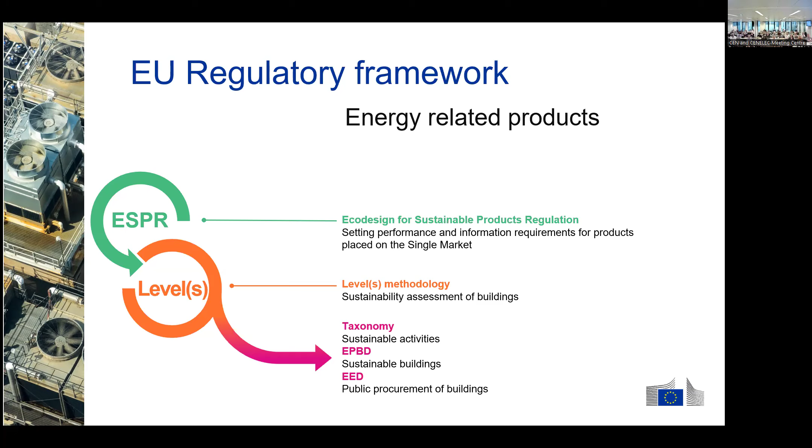And there is an easy case, which is, for example, gypsum, that is not in the work program of eco design. In this case, you are in the field of the CPR. We will establish obligations under the CPR, and then this information will go to the other national or European legislation.

What is the situation that is not in this picture? The products that are not in the harmonized zone, the products for which there are no standards. They can go to EOTA to ask for an EAD, but the usual practice will be that they will deliver the information through EPDs. So the voluntary EPDs will always stay for the products for which there is no regulatory implementation under the CPR, which is, as I said at the beginning, a lot of products. When we start harmonizing more and more, this area will become a bit smaller.

As you know, there are different policies. Probably the most relevant is the EPBD because it has a very clear timeframe and very clear goals, and we are already working on the implementation. It was adopted last year, and there are very clear goals to make sure that buildings, in particular new buildings, but also at one point there will be horizontal obligations, will really have a very low environmental impact.

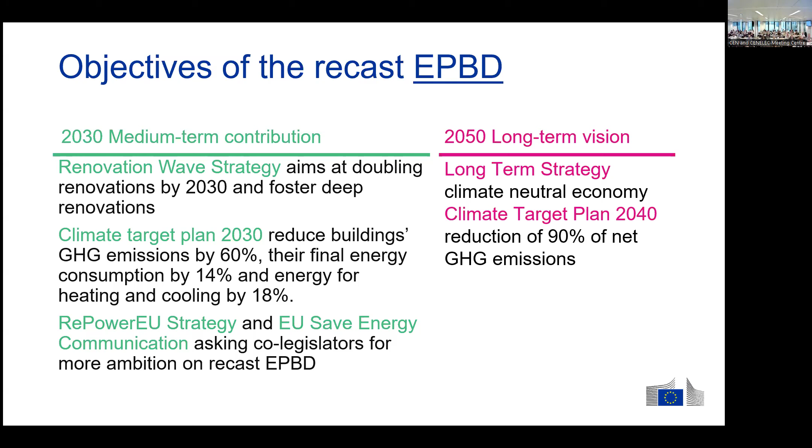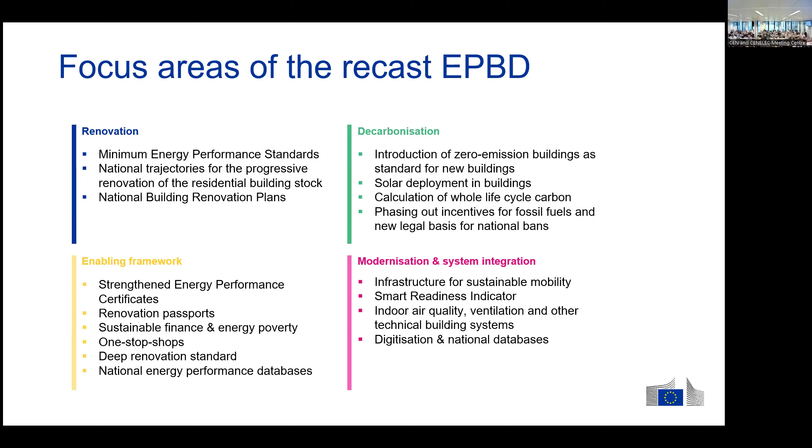To make sure we do the calculation at building level. As I said, the EPBD is very broad. I think there is a limited impact of products in the regulation. You also have design, a lot of provisions, but what we need to make sure is that what we deliver really works in the context of the EPBD. Maybe the most relevant thing, directly connected to the work of CEN TC 350 and the c-PCR, is the new obligation for the calculation of life cycle global warming potential of new buildings.

This is a short summary of how it works. You see that it's only addressing CO2 emissions—of course they don't really care about the other indicators. This can be done at national level, but not in the EPBD. The calculation is per square meter of useful floor area. The reference period is 50 years. This is in the regulation, so it's fixed.

What is important is that the modeling is EN 15978. The standard is under revision, so the methodology really follows the traditional approach of EPDs and the Level(s) framework, which is also connected to this standard.

What is I think the main message? There is an ongoing revision of Annex III in which the methodology is fully detailed. Annex III will be revised by the end of this year. There is already an ongoing discussion with member states and stakeholders to see how this is introduced.

I would say the main added value of this discussion now is to make sure that if the information comes from the CPR, this is the highest level of information. So you will always need to use the information from the product, which is really the added value for you as manufacturers to deliver this information through the CPR, because it will be the source of information. There is no possibility to go for databases or other systems if there is information already delivered under the CPR.

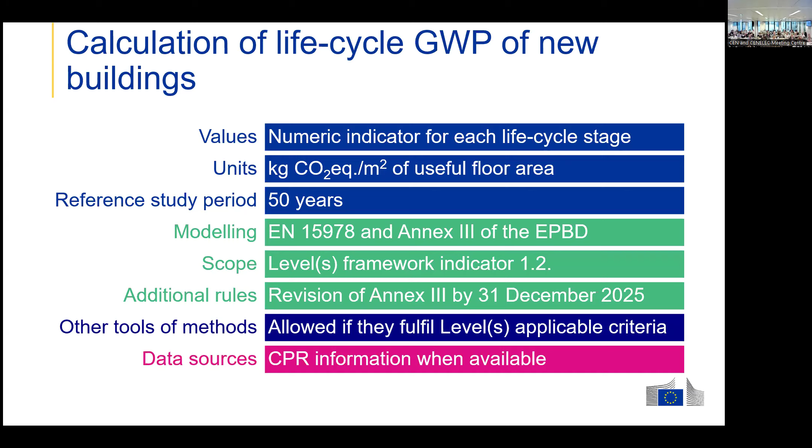But please don't focus only on buildings. I always say that—I know buildings are very important, they have a framework, but we also want to reduce the environmental impact of civil engineering works and other constructions. It's important, and sometimes the most impactful works are not really buildings. I know it's obviously targeted by European legislation, but we need to deliver information in a broader context.

What you saw was declaration, but the directive also established the need to publish roadmaps with the idea of reducing the environmental impact, the CO2 emissions. So it means that just declaring the CO2 emissions will not be enough. In the coming years, there will be pressure to reduce the environmental impact of buildings.

What is positive about this approach is that the reduction is at building level—we are not reducing CO2 emissions at product level, it's at building level. This gives the designer and everybody the possibility to really choose and design the buildings in the best way.

I think this is quite an important step because I have been involved in CEN TC 350 for years, and one of the mantras of this TC is always focus on building level, never do comparison at product level—this is exactly what we have here. So I hope the directive will make sure this is really the approach, and we do not start a pointless competition on minor comparison of products while the big picture is overlooked, which is sometimes the case with this kind of product comparison.

Well, before going to the digital product passport, I think there are other initiatives that are very relevant. As I said, the taxonomy. Taxonomy is focused on financial.

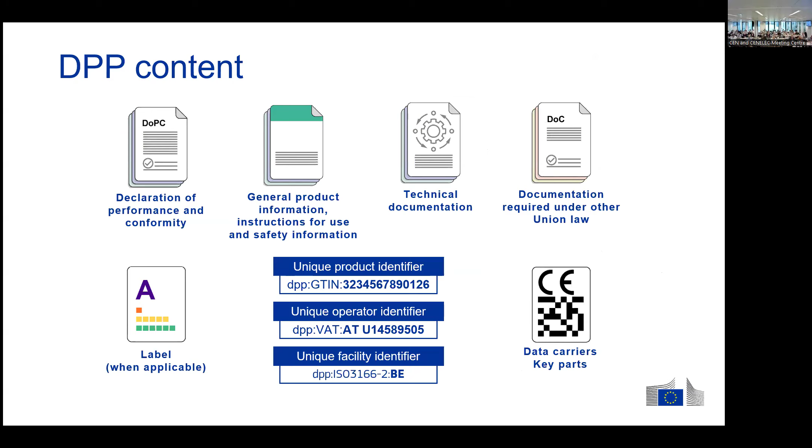The information you see, I think, is very important. You see the documents from the CPR, but also documentation required under other union law, which helps ensure this will really work. Here you can have eco-design, other regulations, information related to other policies. And the idea is that this really becomes the entry point for the information. That's a bit the summary.

I know it's difficult, specifically if you are an LCA expert or very focused on the CPR or on EPDs, to see the big picture, but I can tell you that there is real value in delivering so much information. There are also ways to ensure these will really be used in the right way.

And we have been working in the Commission to try to reduce the burden of dealing with different regulatory frameworks at the same time. In the case of the CPR, I hope the harmonized area really limits the possibilities of member states to create systems that add an additional layer of complexity and complicate the life of manufacturers. But this is really an element that is in the CPR, not necessarily in other policies. So that was all from my side.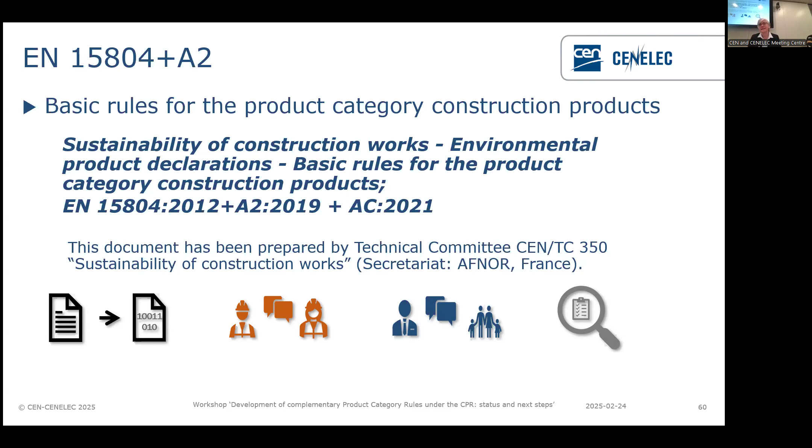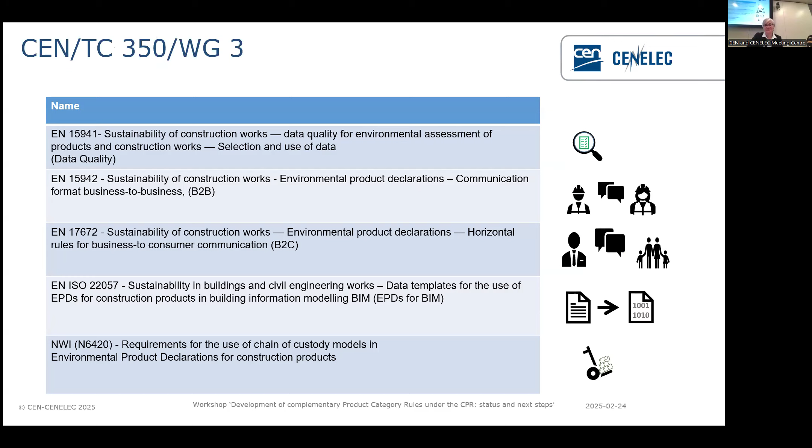Beside EN 15804, which was mentioned several times today, we have also developed other standards, like one for digitalization, one for business-to-business communication, one for business-to-consumer communication, as well as one for data quality. It's worth mentioning this because some of these standards will also play a role in the whole CPR acquis process. For those who would like to look them up, here's the list of the different standards developed within the last years by CEN TC 350 Working Group 3.

Now let me give an introduction to what an EPD is, because a lot of elements from an EPD will enter into the Declaration of Performance and Conformity. EPDs are based on EN 15804.

These are documents of approximately 10 pages. EPDs contain the results of a life cycle assessment of a product, covering cradle to grave. I don't know if you are all LCA experts here in the room and online - if not, allow me to say 2 or 3 minutes on what an LCA is.

According to the standard, it's defined as a compilation and evaluation of the inputs and outputs and the potential environmental impacts of a product's life cycle. What does this mean in practice?

If you want to conduct a life cycle assessment, first you need to collect data in your company for the manufacturing process. For instance, how much electricity consumption is needed to manufacture a floor covering? How much thermal energy is needed? You need to collect data for the material used, and for the waste and water used. All this data needs to be collected by the manufacturer.

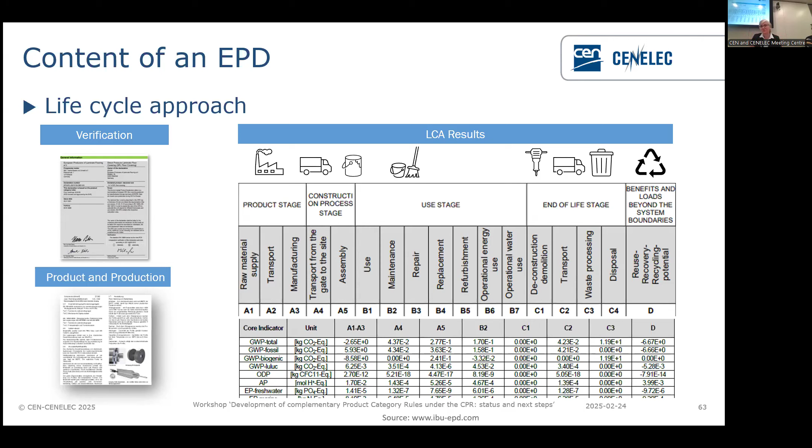And at the end, we have the table with results, global warming potential, ozone depletion potential. This is the core of every EPD. On my next slide, this will probably be the homework. Oscar, you presented something similar this morning. This is the homework to define the scenarios.

The product TCs need to reflect on the different modules. For A4, for instance, how is it transported to the point of installation? A5 is the installation. Are there any additional raw materials needed? Does the floor covering need to be glued? Is there any electricity that needs to be used? Then we have the maintenance, B2, but it could also be B6 if this is an energy consuming construction product.

And then you need to reflect in your product TC group on the end of life. What is an appropriate end of life scenario, and is this realistic? Please reflect: is there any energy consumption needed to extract it from the building? What are the transport distances? Imagine there's one recycling facility, let's say in Berlin. You need to consider the transport distances to this recycling facility. So these need to be realistic scenarios.

So just bear this in mind, these will probably be discussions that you need to moderate or that you will have in your product TC when developing c-PCRs.

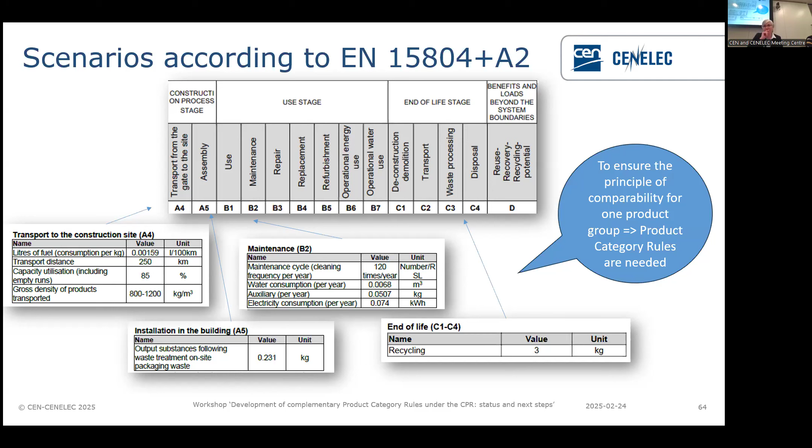Now, to ensure the principle of comparability for one product group, we need the product category rules. Because, coming back to the floor covering example, what is the cleaning regime for floor coverings in hospitals, in hotels, or in an industry hall? Here, fair and clear rules need to be established, and this needs to be done in the PCR document.

So overall, a product group is a group fulfilling the same function. It's clear you have the product TCs, and the complementary product category rule comes on top of EN 15804. So please first read EN 15804 and then reflect on what additionally you need to define for your specific product group.

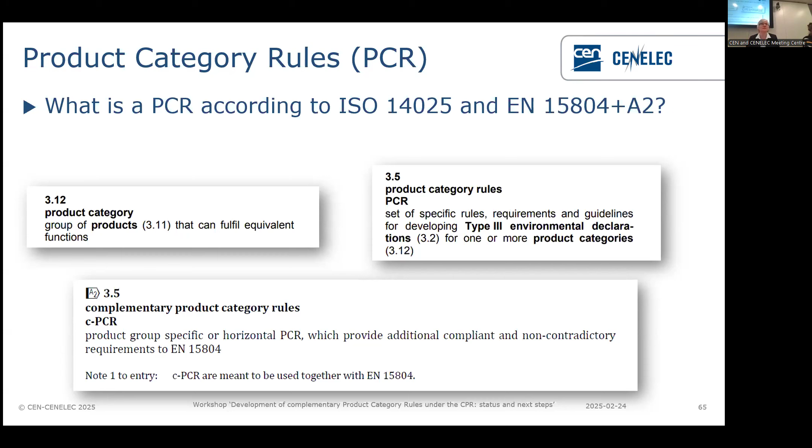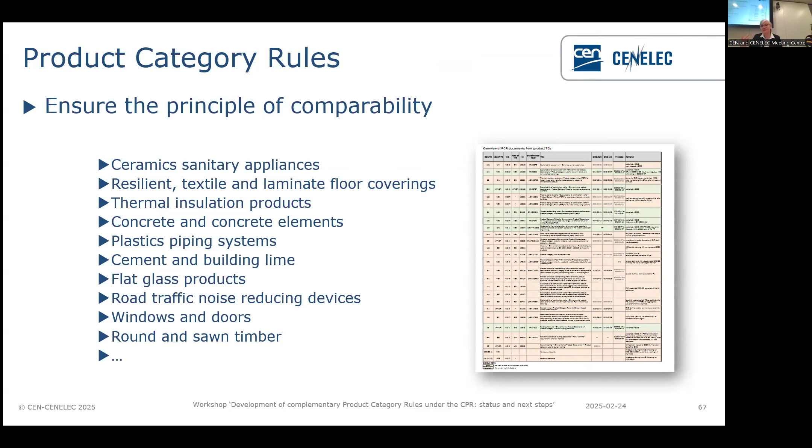We saw this morning, Nuno, you already introduced the different c-PCRs that are published or already in the pipeline. So you are all aware that PCRs are already published and that a couple of activities are already taking place to develop c-PCRs.

I hope you are now all very motivated to create your own c-PCRs. What we offer is templates that you can start with for this exercise.

We provide templates. We are the point of contact in case of questions before the inquiry. You are always welcome, let's say for 10 or 15 minutes, to present your questions in the working group 3 meetings. We comment on the c-PCR in working group 3 meetings during the inquiry.

And imagine, last week we had 50 people in this meeting. So this needs to be well prepared in order that I'm able to moderate this whole exercise. So please be prepared, send us the ready-to-go c-PCR so that we manage to comment on this in our meetings. We check the compliance with EN 15804 plus A2.

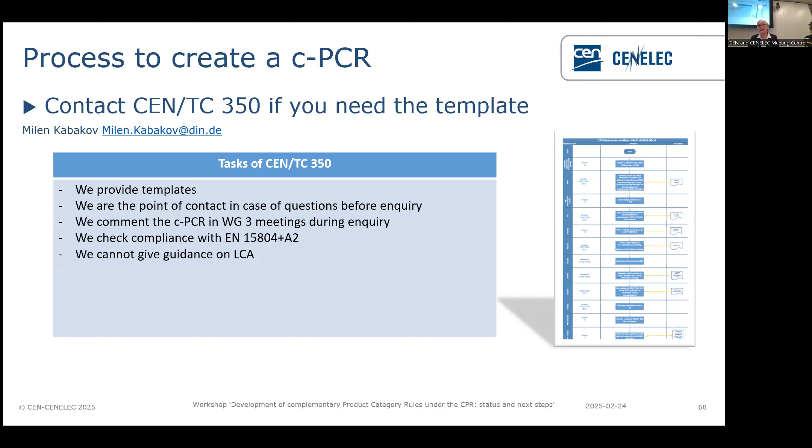And let's say 3 weeks ago I added the point: we cannot give guidance on LCA, the hotspots, what are the hotspots for the different product groups in terms of LCA. This is something you need to figure out maybe with an LCA consultant or with expertise in your product TCs. But this is nothing that working group 3 can offer - that we can let you know, okay, what are the relevant raw materials for a floor covering, for instance. So it's highly recommended to start this exercise with an LCA preliminary study or with expertise that you gained during EPD projects. So this is very important. We cannot give any LCA consultancy from this working group 3 group.

You need to draft your c-PCR and define, for instance, the functional unit - square meter, a ton, meter, whatever. You need to define the technical properties to be mentioned in the EPD. You need to specify certain LCA requirements if needed, for instance the allocation of loads to co-products. You need to define plausible and realistic scenarios for the use and the end of life.

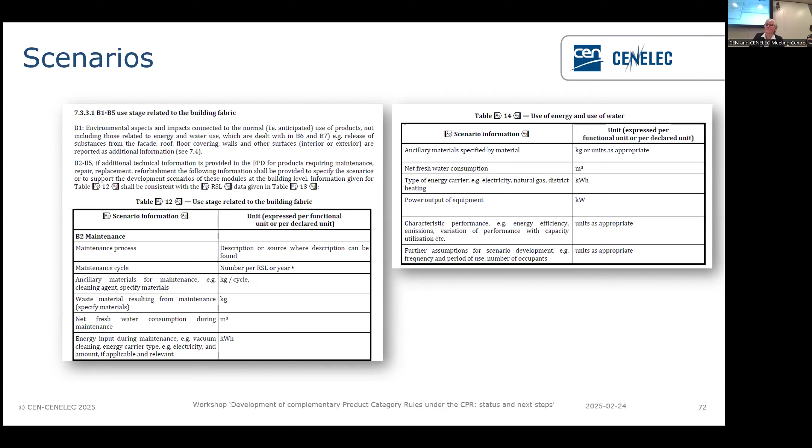So when you initiate the work, also inform CEN/TC 350. At inquiry, it's good to trigger them as well so they can check the documents. But I think one of the most important points, which we learned a bit the hard way, is don't submit the document to formal vote, because if CEN/TC 350 finds out afterward that the document is not aligned with EN 15804, then we're after the formal vote and need to ask for exceptional procedures to the BT. So ideally, for formal vote, contact them before submitting the document.

At the end, I've heard you. Yeah, you. The mic. Microphone, please. Is someone's mic still on? No, can you try again? Yeah, it's on.

So I'm working with CEN TC 8, and I have no general comment, but I saw on your slide deck that you mentioned the issue of workload coming with TC350, and I'm also very concerned with that. A lot of people have pointed this out several times to the Commission. I wanted to ask, has there been any feedback from the Commission on this issue around very short deadlines and the lack of resources? Because often we bring this up, but it disappears. So I was wondering, has there been any engagement from the Commission or any openness to look into this? Because fundamentally, this is going to be an issue in the coming months.

Well, what we're doing as TC350 is we have a very good dialogue both with Nuno and with Oscar on the issue. We're also in the process of preparing a document, and based on that we identified that there might be needs for support, and we're investigating what the possibilities are. There might be a possibility, but it's to be checked. There are also some other elements, but I'll come back to that in my presentation, that might be assessed by the consultants or the European Commission. So indeed, we've also identified that, and we are in discussion about it.

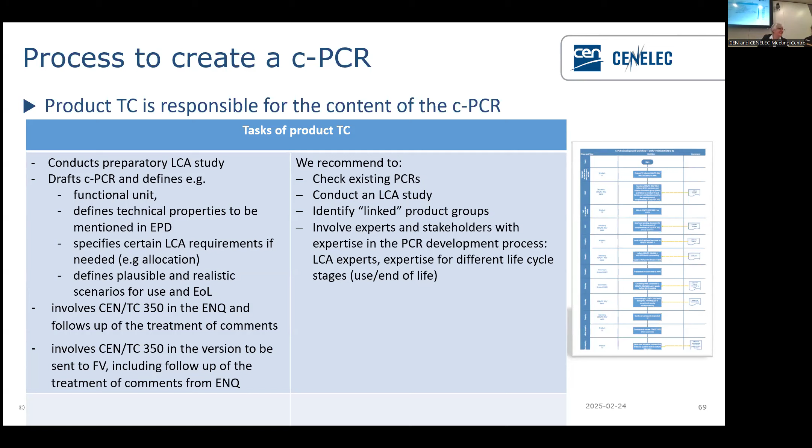Erik Willem-Pennings excused himself yesterday to me because one of his family is hospitalized. So I will do my best to take over. His presentation might be a bit shorter, but at least I can hand over the key elements of it.

Because we used to have the CEN Sector Forum on Construction, where the different TCs dealing with construction meet regularly to discuss and to keep each other informed. This has been very recently renamed into, and I must read it myself, a coordination group on construction and the built environment, with slightly different terms of reference, but that is of less importance.

But what is important is that we have been identifying in that group that there is a need to collect issues, questions, gaps identified dealing with the construction, the CPR, and standardization. That has been the main issue.

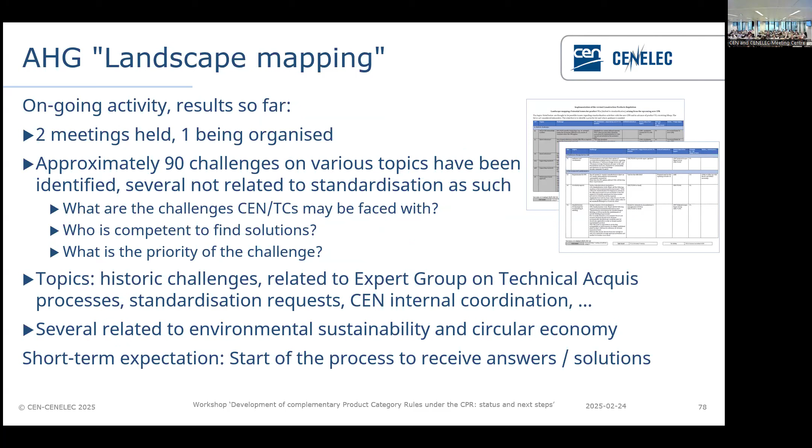And so there are several environmental and sustainability aspects. This is how it looks like. Some examples he has put in. It touches some aspects which we have been discussing this morning or this afternoon in relation with ESPR, the intended use over 50 years. So we're right now in the process of trying to well define the issue and trying to have a first idea of who could be the right person to deal with it.

And is it a high priority or a low priority? And that will then be discussed in the next plenary meeting also.

Why do we have this? Why did I want to have this presentation today? It's that the product TCs are aware of this exercise, and so also that if you have any horizontal aspect, not related to a very specific technical issue, but something you identify as a gap or something which is missing, or there's no guidance for this or for that. For example, there's one line on factory production control, there needs to be something developed. We don't know if it's been taken on board. So there's a place to map it.

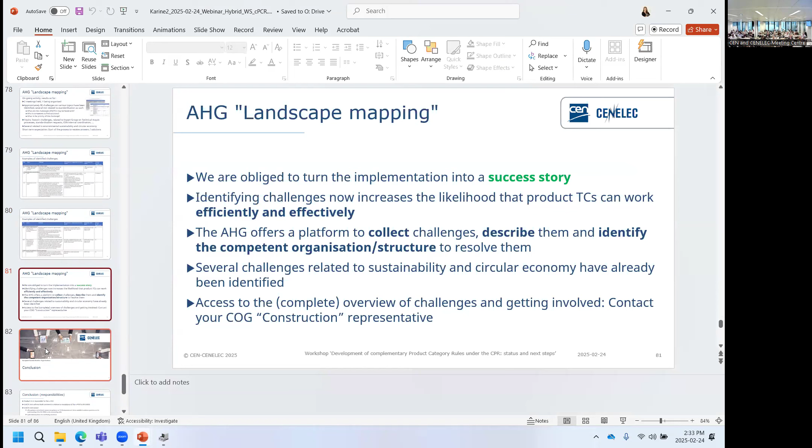Okay, so the second part of this, part on gaps is that, as I've been saying, there is...

That's okay. There's also a lot of procedures, and also for TC350 it's new. There's the European Commission, there's CEN and TC350, the product TCs, there's a whole lot of work, with the goal to develop DOPCs which have sufficiently robust information to be used at building level and a whole range of other applications. The task of TC350 was identified as: please, you have the experts on board to check compliance with EN 15804. From that, of course, several other questions arise, and the basic question is: is this sufficient? That was the origin of the discussion which we are having with the Management Centre and with the European Commission.

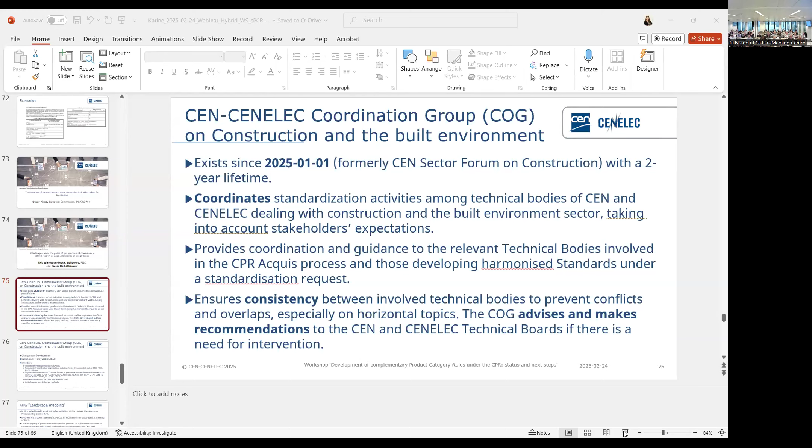Okay, so c-PCR compliant to 15804, but as was mentioned this morning, on different occasions, you must also be compliant to the standardization request. There might be other elements in it, and that's really crucial.

And also for that, this is becoming clear, and we are preparing guidance to explain all these different elements. It will contain who is doing what. So for every product TC, it will become clear what you need to expect from whom. We will try to involve some general guidance on the different clauses of 15804, like model clauses or model texts.

Of course, we know that ideally, when the CPR is published, all of this is ready. But I hope you can understand that it's not possible. It depends on the experience of every product TC. So this is an exercise which will evolve over time, but there will be something upcoming, maybe within 4, 5, 6 months. It's yet to be seen whether it's guidance or a guide. But that's what we're working on.